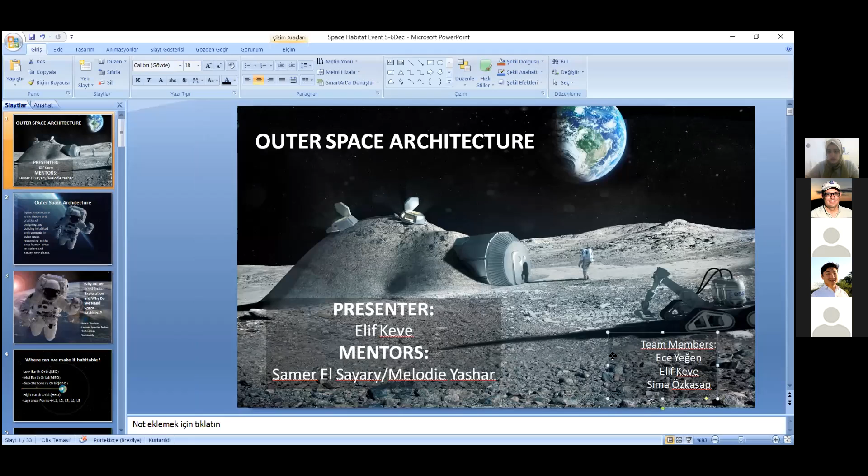I think there is something wrong here. I'll have to move this part. It's out of the screen.

Today I will talk about space architecture and present the project of our mentors, Samer El Sayary and Melodie Yashar. Our team members are here, Ece and Sima, with me. We are trying to study together about space architecture with our mentor teachers.

Firstly, I want to start from the beginning, about the definition. What is space architecture? There are two different titles: Earth architecture and space architecture. Most of us are Earth architects, developing on Earth. But actually, space architects are not only working in outer space, they also work in extreme lands on Earth, such as the Utah Desert and Antarctica. They have some places to work in extreme lands.

But where is the outer space? Outer space means the place where we escape from LEO - it means low Earth orbit. After that, it's outer space. So all the work after the low Earth orbit means outer space architecture designing.

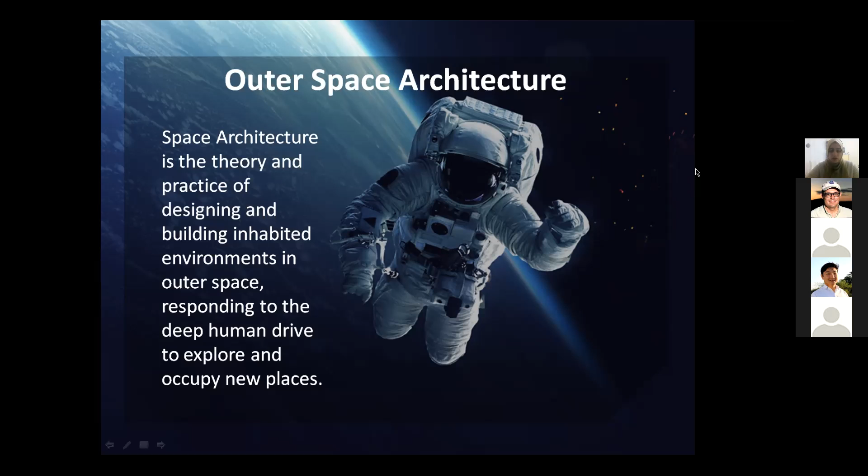Space architecture is a theory and practice of designing and building inhabited environments in outer space, responding to the deep human drive to explore and occupy new places. Space architecture connects astrophysics, psychology, medical science, astronomy - a lot of different titles. So a space architect should study different titles as well.

But why do we need space exploration? Why do we need space architects? There are a lot of different concepts on it. People wanted to develop space tourism, and space tourism is usually the concept of Virgin Galactic, and there's the thought of Elon Musk to spread human species around the universe. So some people are thinking about developing technology on Earth with the space industry.

The most important thing, I think, is that the curiosity of humans is a main issue about space exploration. So when we make a space exploration, we come up against the human factor. Human psychology is the biggest problem in space exploration, to immigrate to other lands. So what is the solution to solve this human factor, this human psychology? That solution came from architecture, design and art, because humans feel better and more comfortable in a beautiful place. So that's the source of space architecture, not the engineers only.

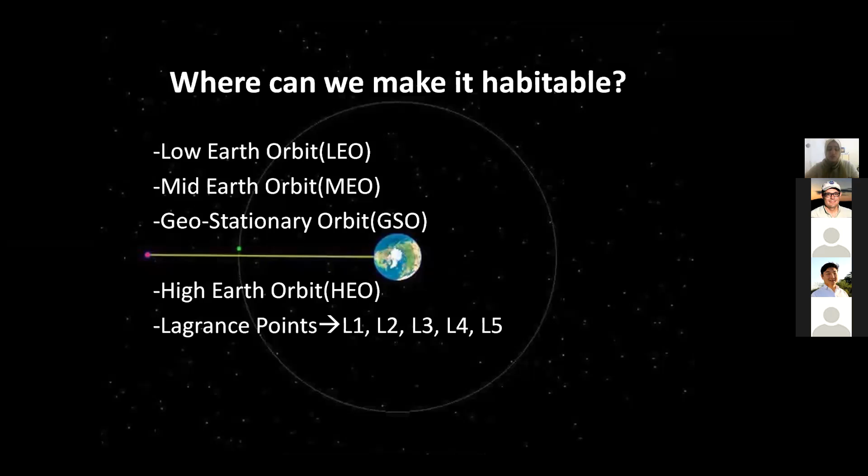In space architecture there are different titles. One of them is planetary architecture. In this presentation, I will try to explain more about space architecture in planetary architecture. We usually have land in this title - it can be asteroid mining, moon, Mars, and beyond.

In orbital architecture, it's completely different because there's no land, no gravity, no source. We need to understand astrophysics for making artificial gravity, and we need to regenerate all sources and LSS, life supporting systems, for orbital architecture.

I will firstly try to explain two different projects of space exploration architecture belonging to our mentor Melodie Yashar. First one is phase 1, ice house, and in phase 3 I will try to explain Mars X house. Most of these are created on the concept of not digging under the regolith, but building up on the regolith, to design projects for having light for human psychology as well. These projects are a brief chronology of space exploration architecture company works for NASA's 3D printed habitat challenge.

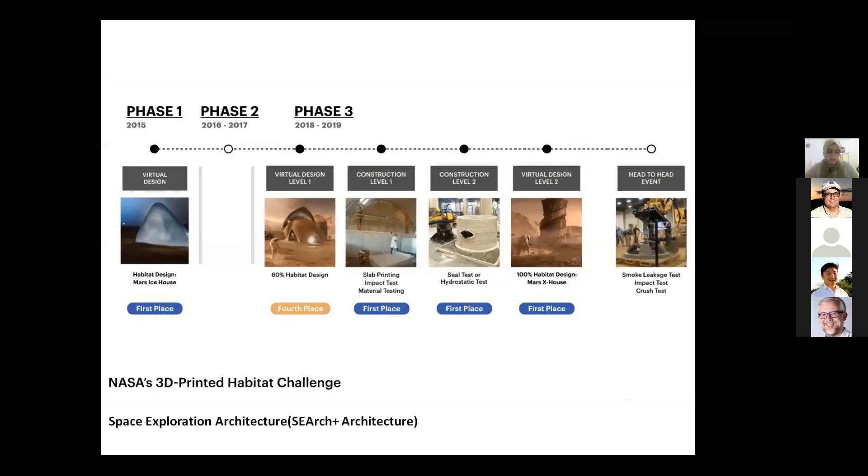In phase 1, there is ice house. This project won first prize in NASA's 3D-Printed Habitat Challenge in 2015 by space exploration architecture. For erecting this building, there are different mechanisms. One of them is Wasibo itself - to WaSiBo and iBo.

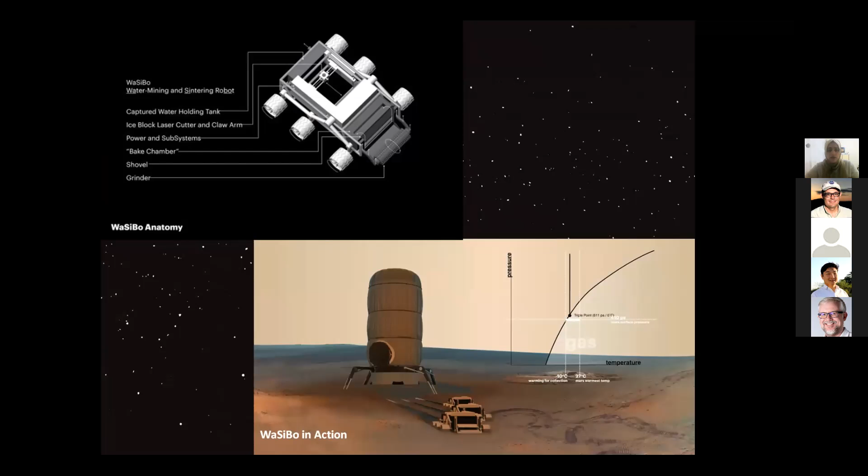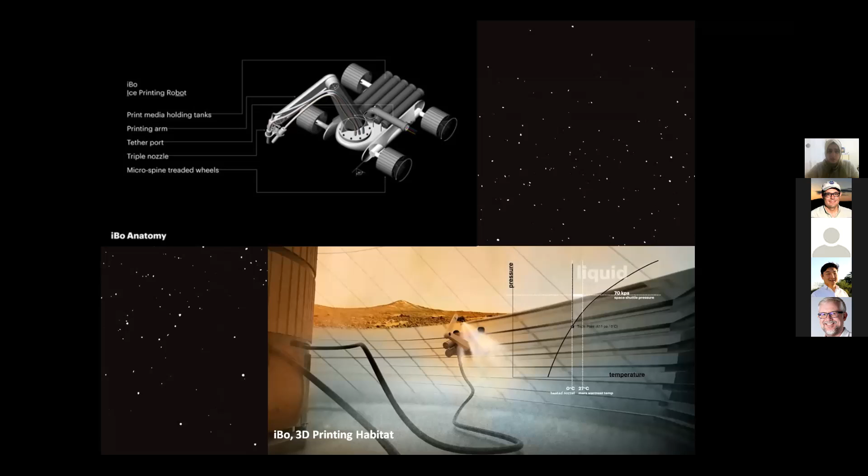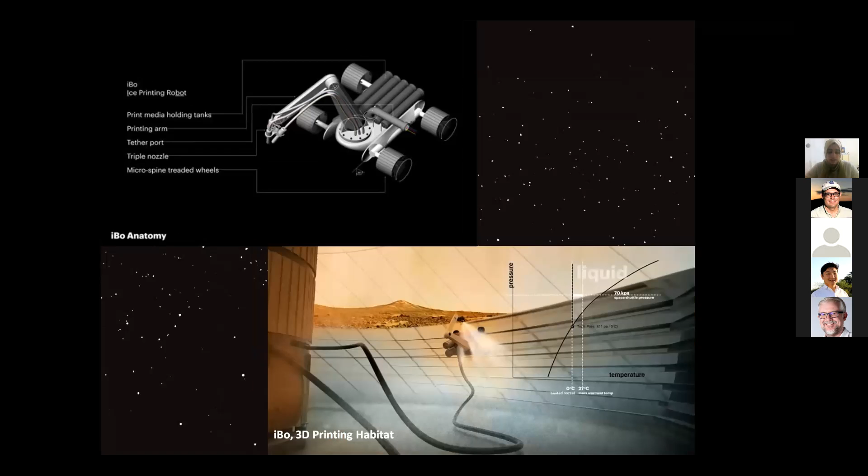Wasibo is a machine that creates the base of the ice house - it means the exterior one. The next one, the Ibo machine, makes the inner part of it. Wasibo is a regolith sintering robot for the foundation of the habitat. It's fully exterior to the pressurized membrane, so it's not bringing in regolith contaminant. Ibo itself would be the interior pressurizing membrane, which would deposit water ice or vapor on the inside of the pressurized membrane.

The ice house IBO is working on the inner part, because it's a double shell structure, so ice itself makes radiation shielding. We see here the double shell of the Mars ice house, which is partially pressurized, making a livable area in the middle, and this having the ice in the project.

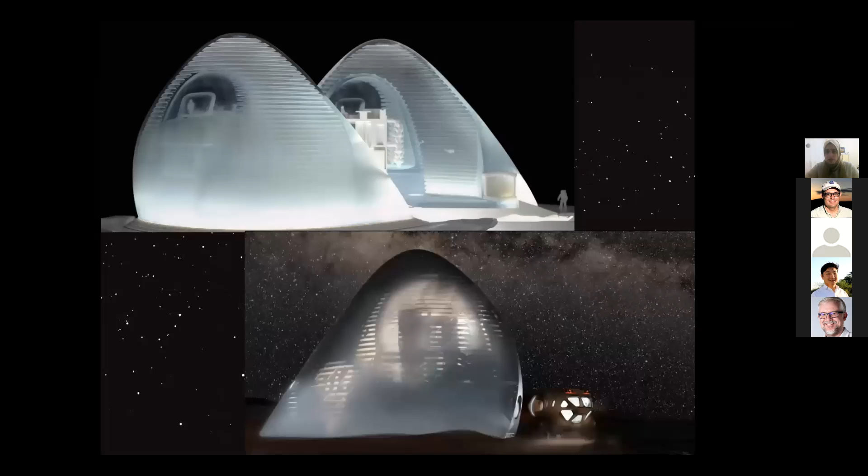The purpose is taking the fresh light to the inner part of the habitation. You can see here the night view of the ice house, and a short video showing how it's been structured.

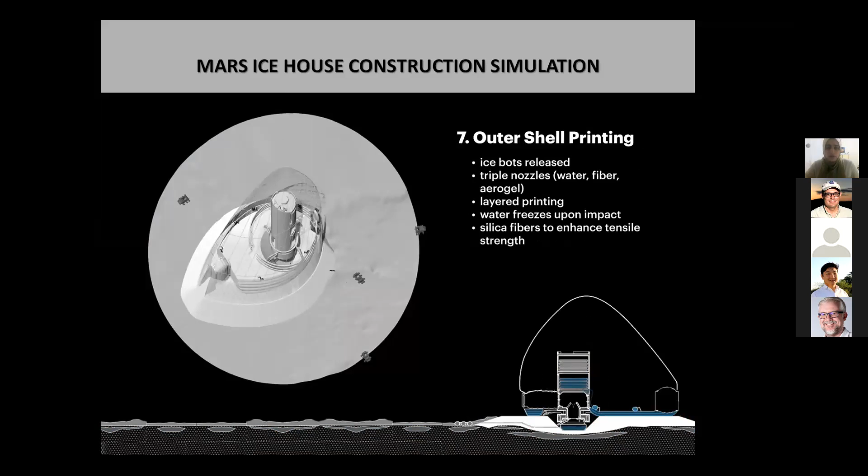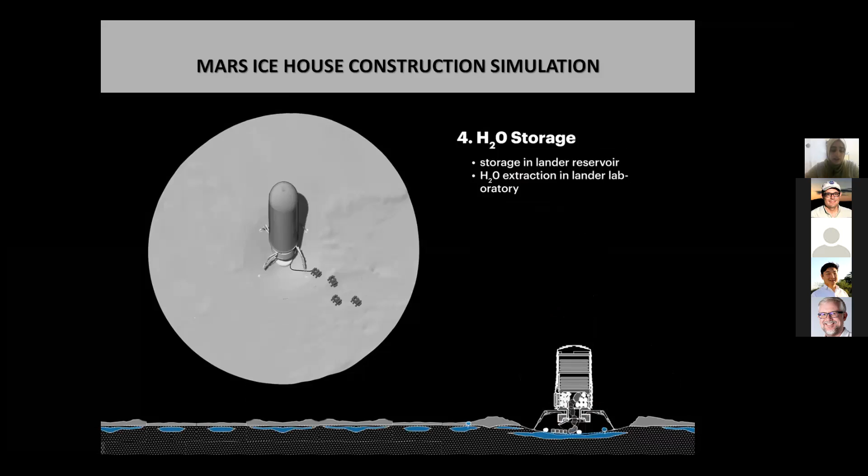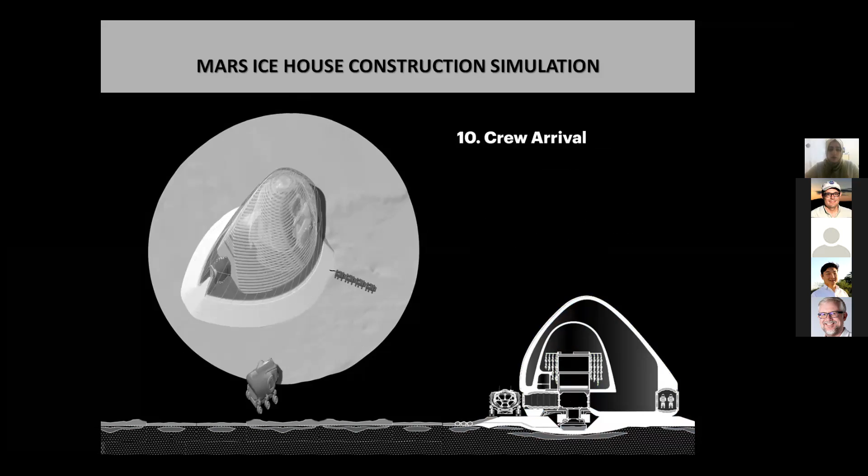First we make descent landing, and after landing habitat development starts, along with water storage. After having water storage, they create a foundation, ETFE membrane inflation, and outer shell printing, then inner shell printing and plant growth. After the plants grow, the crew can arrive at the place to live.

Now I want to shortly show the plans of the project. In level 1, you can see number 1 is the rover airlock, because we need an airlock in other space lands, as living outside is different and very difficult for human psychology. The second part is entry, and the third is the yard.

In level three, on two sides there are crew quarters, and on top of it there is a free plant developing place and resting area, a library, and the laboratory itself.

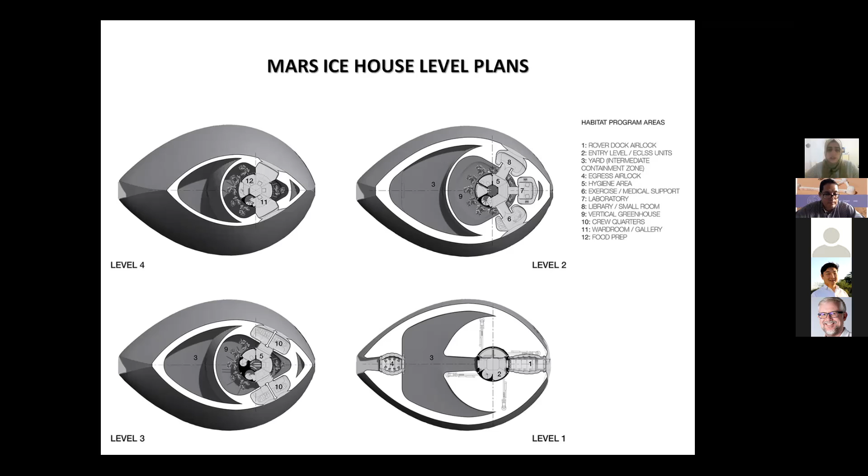The second project, again from space exploration architecture, is the Mars X House, which has two different versions: version 1 and version 2. I will explain more about version 2, which is also the phase 3 first prize winner.

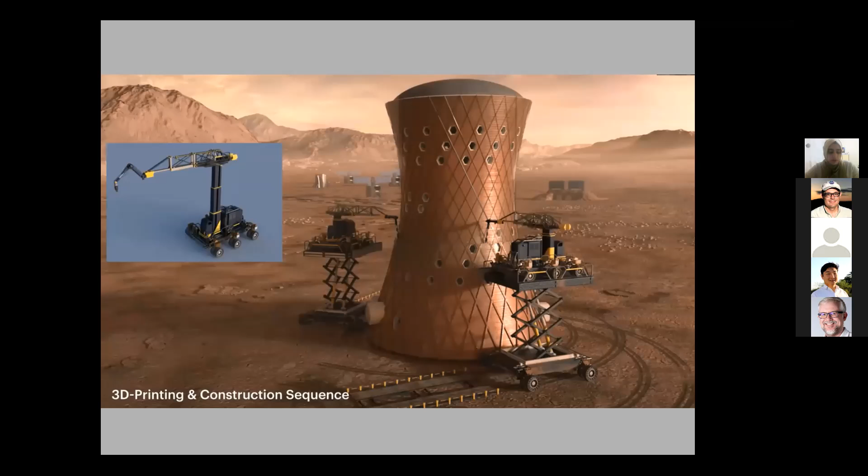For the material, sulfur concrete has been used in the regolith shell. In this project as well, the concept is to take fresh light inside the habitation. For this construction, a lot of mechanical systems and many components will need to be brought from Earth.

Here you can see, firstly, we start construction inside, and it shows the construction sequence on the right side, how it starts on the inner side.

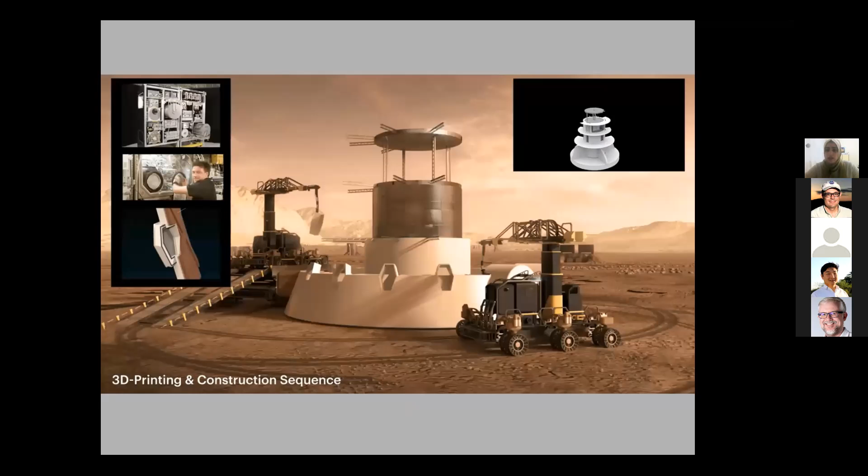Mars X House is designed to exceed radiation standards in order to ensure human health and vitally connect the crew to natural light and views of the Martian landscape.

In the base we have HDPE. What is HDPE? It can be sourced from plants on Earth, and it's often used for plastic creation on Earth, but here it's used for the base on the Moon, Mars, and beyond.

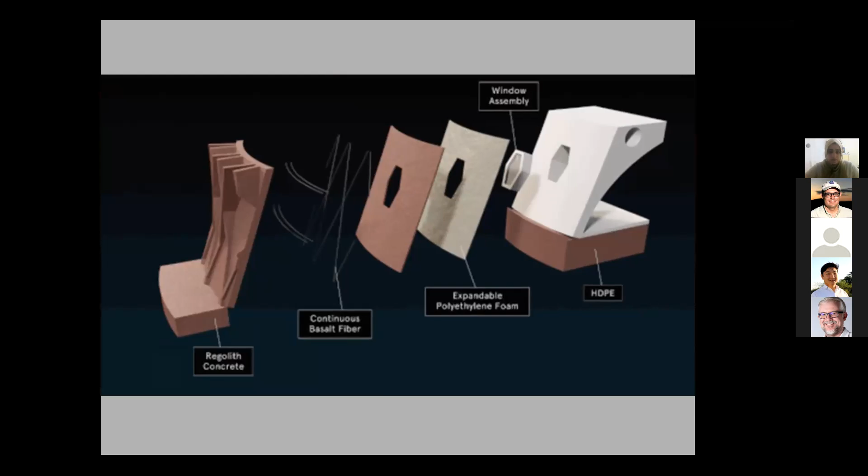Here we can see how it's created in the exterior wall for opening windows. Mars X House introduces the design and constructability of a future habitat for 4 crew members to live and work on Mars for the duration of 1 year, 1 Earth year.

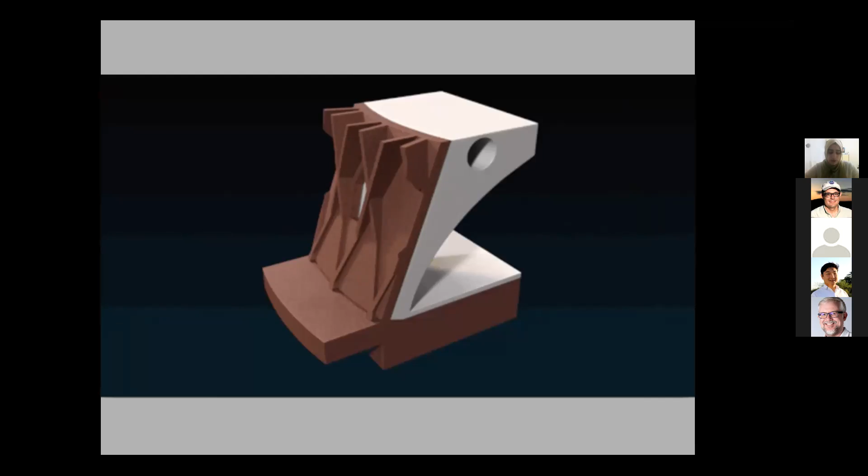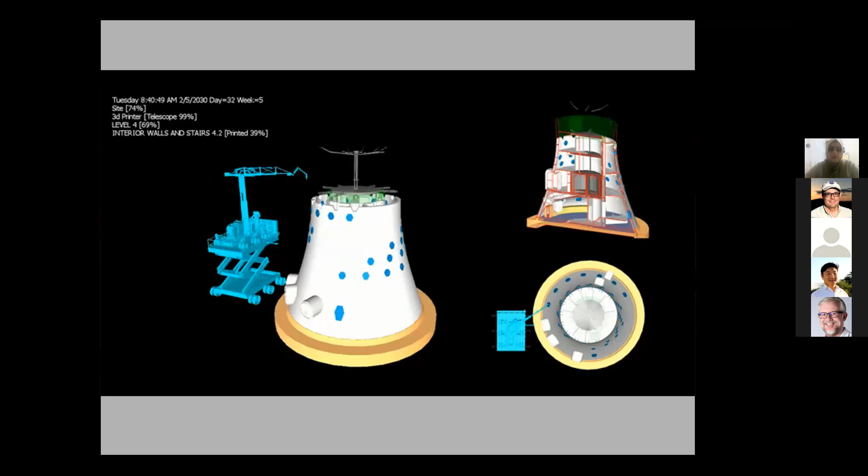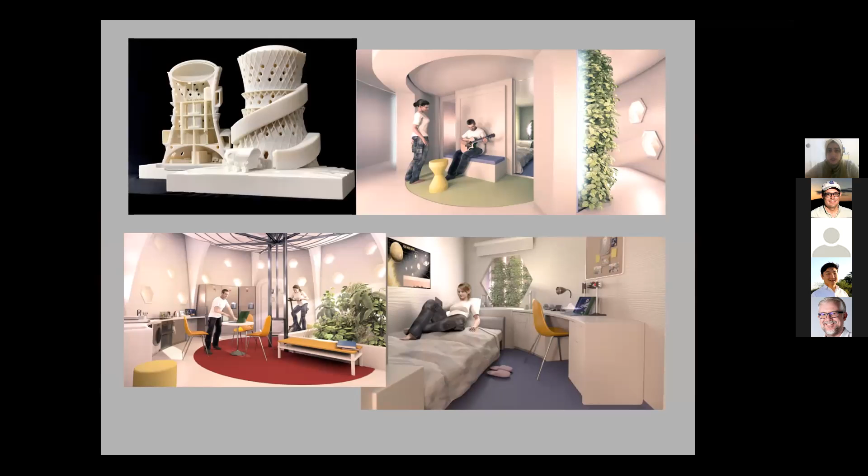For every layer we have different openings for lighting, and it's covered with the regolith. On the left side we have 3D printing, and some interior pictures of it.

Finally, I want to shortly explain another project from our mentor, Samar El-Sayari Architecture. He is designing this project for the moon contest, and it won first prize as well.

It's named Space Scraper. In this project, we have a different concept: the human living area is all under the regolith, taking advantage of the low gravity on the Moon.

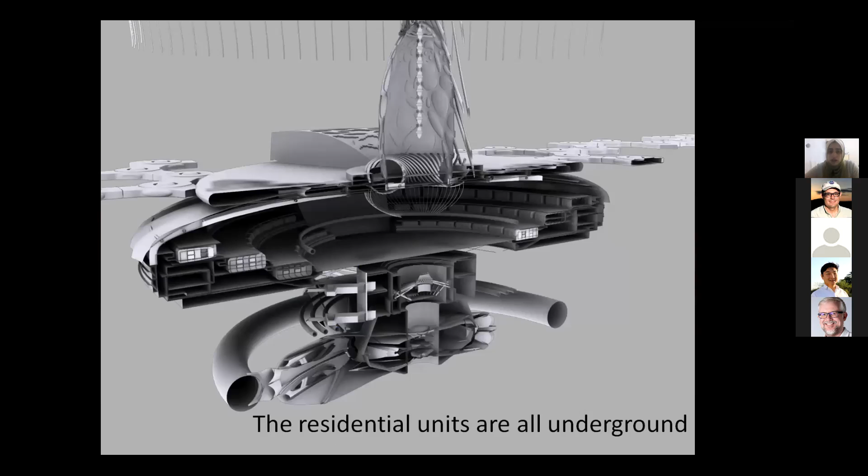In the middle there is a tree, named the Tree of the Moon. There is a core in the middle that takes all the frozen water and turns it into drinkable water for the humans living here.